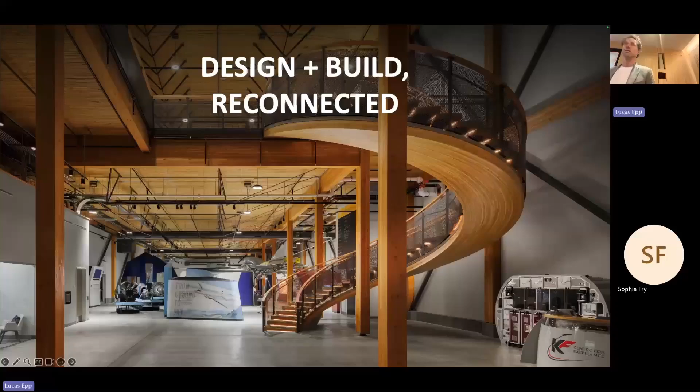Our company, StructureCraft, we're both structural engineers and builders, and we're founded by my father, Gerald Epp. And given that this is the International Association of Bridge and Structural Engineering, in some ways he should be talking here about his incredible bridges, because he has designed some masterpieces in timber footbridges.

And so our company, we work across North America and Asia. Starting to do a little bit in Europe, but not a huge amount. And we work on all types of buildings and structures, from long span roofs to bridges to office buildings, all sorts of interesting different structures, primarily with a bit of a focus on using wood as a structural material.

But perhaps uniquely our team, because we're both engineers and builders, we have carpenters, we have installers, we have people who know how to run cranes. We have master craftsmen, and we have computational designers and engineers. So we have this wide range of people who get involved all the way from conceptual design through to manufacturing and construction.

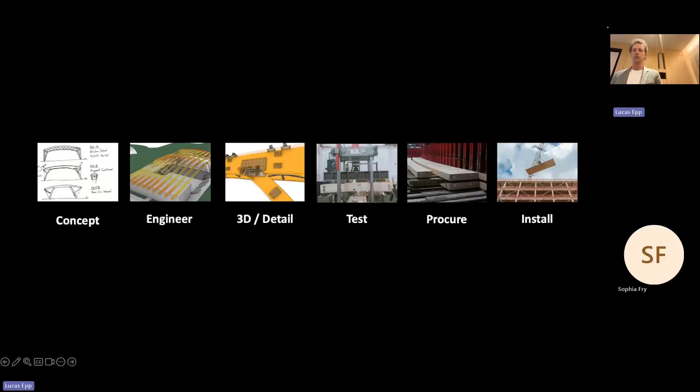And so today I want to talk to you a little bit about why we want to try to encourage a reconnection of design and construction. Going back in time, of course, there didn't used to be that separation. And I love this quote from Jörg Schlaich, where he talks about labor cost outweighing material cost, and as a result, we maybe don't put as much effort into the structures that we design, or we're not given the fee or the budget to put that effort in.

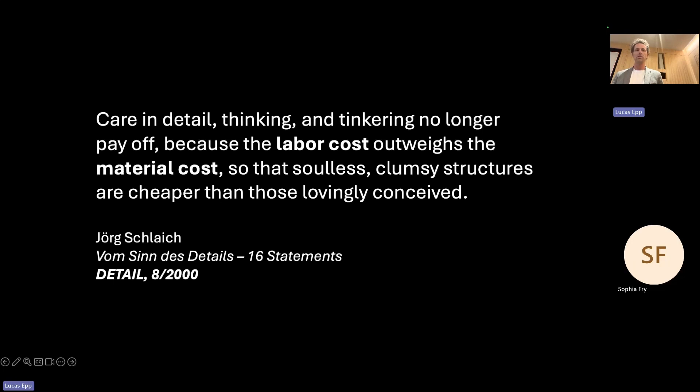And so then what results, if you look at our current building stock, results from the inability maybe to apply thinking as much as we perhaps used to. And so thinking about this a bit more, I started thinking about the interfaces that have arisen between us as

Everything good? Oh, okay, move it over.

Okay, thank you. But the interfaces that have arisen between us as designers or constructors and the buildings that we build. And I remember when I first moved here to London, I think it was 2008, I went and saw a lecture by Bjarke Ingels, and this was my first thinking about, okay, this is an interesting interface to think about design. Let's make it a cartoon, and let's communicate our designs through a series of almost cartoon-like diagrams.

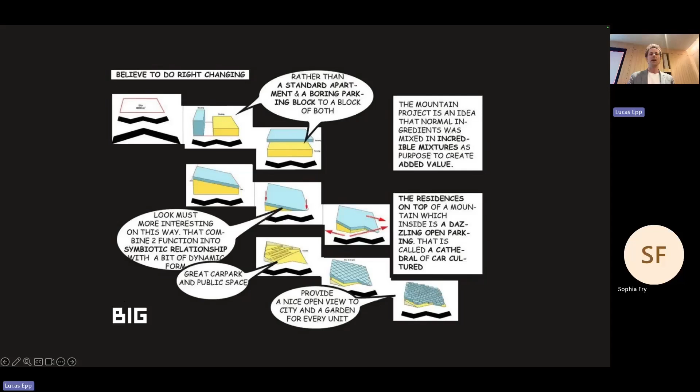But of course, we construct many different interfaces between us and our designs. Maybe that's computational design tools like Generative Components or Grasshopper, or maybe it's finite element analysis for those of you who are structural engineers in the room. But this is my father again, this direct connection between the human and the material. At the end of the day, what we are shaping are structures built out of raw materials.

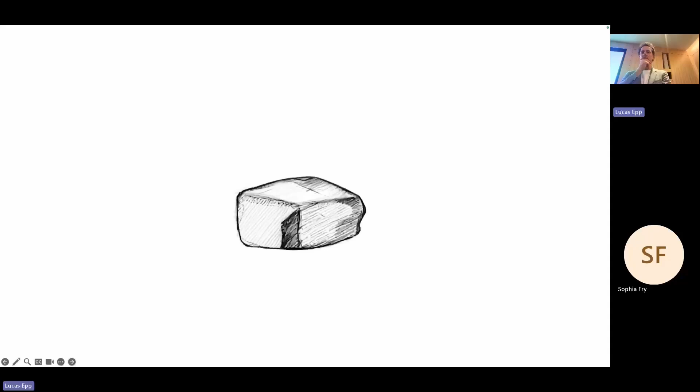And so if we think about us as designers back 6,000 years ago, this is in Mesopotamia, where you were shaping mud bricks with your raw hands to create your own house, right? And you had this almost visceral connection between yourself as a builder or as a shaper of material and the buildings you were designing. And so if you did a bad job, your building would leak, or you would have to deal with the consequences of your design.

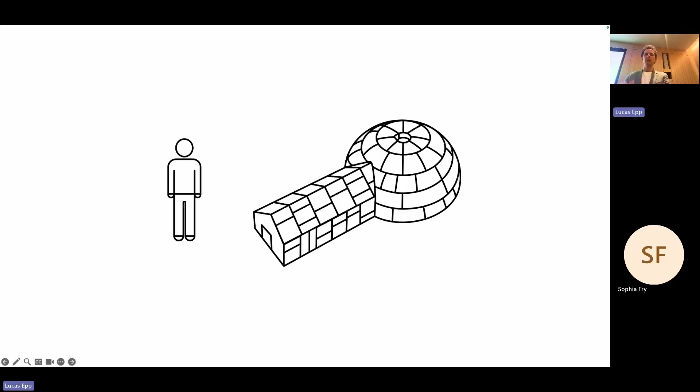And so I think we learned by doing, and we had this intimate knowledge of materials, and there was really not a huge barrier between design and build. And of course, the first interface, perhaps, that was constructed was the drawing, and this idea of abstracting design from the material feedback and starting to draw our designs so that there could be this separation between designer and builder.

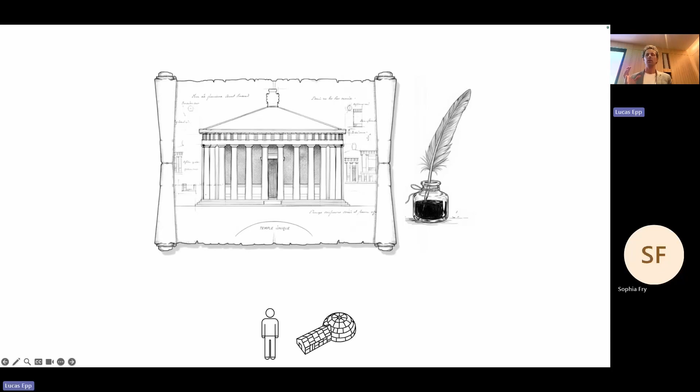But actually the separation between designer and builder didn't really occur until the Renaissance, because there's the architecton, right? The chief builder that connected the design to the construction. But it allowed us to imagine, abstract, but it did remove this immediacy of, say, material feedback. And so I think

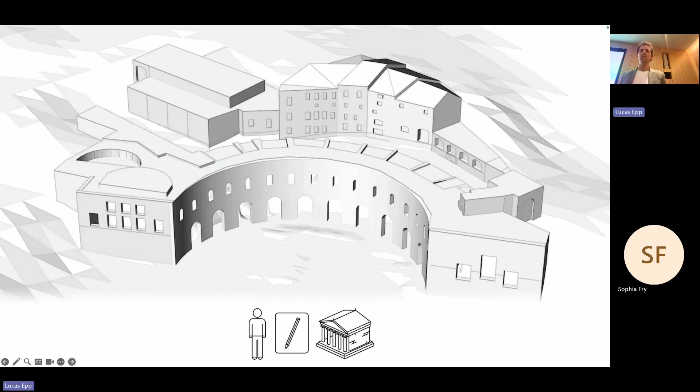And so the modules, I think, though, were beyond just a physical object. They almost became like a shared understanding, which allowed knowledge, like construction knowledge or design knowledge, to travel. This is Trajan's Markets. But these modules, once they became entrenched in the supply chain, designing outside of those norms became maybe a little more difficult. And so they gave us a structural design language, but in doing so, they started to shape what we say.

And then I think about the next interface. So you have the drawing, the module, and then of course the calculation. We start with the Roman arch, and then we start to understand funicular shapes and vaults, and we have groin vaults, and we have all these incredible innovations in using geometry to achieve efficient structural forms.

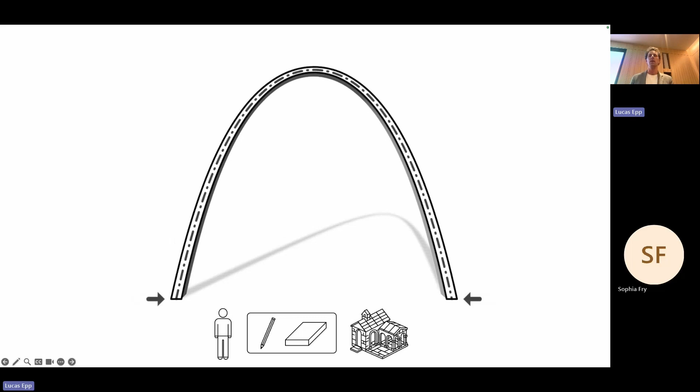But as that changed through time, we've moved from these efficient geometries, haven't we, into rectangular beams, which are highly inefficient, and our groin vaults have turned into big, giant, flat slabs, haven't they? And so it's interesting how, although we have this incredible capability to calculate our structures, often the structures that we do build aren't nearly as efficient as they actually could be.

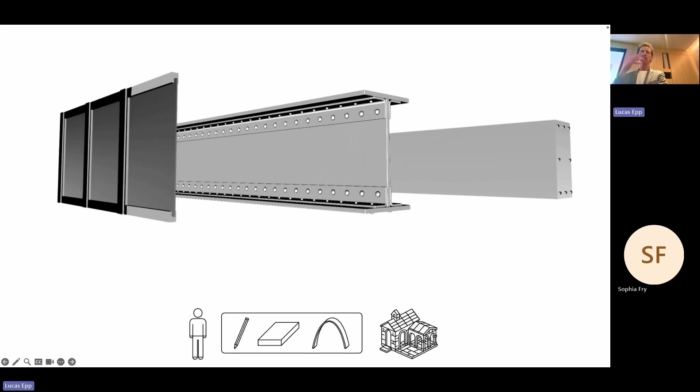And so, the next interface I think about is the catalog. During the Industrial Revolution, the palette of materials we have to design with just exploded, right? In the age of wrought iron, you think about the word manufacturing. It literally comes from the Latin words manu and facere. I don't know exactly how to pronounce it, but those two words literally mean to make by hand, right? And now we look at manufacturing today, it's become mass production by machines, right?

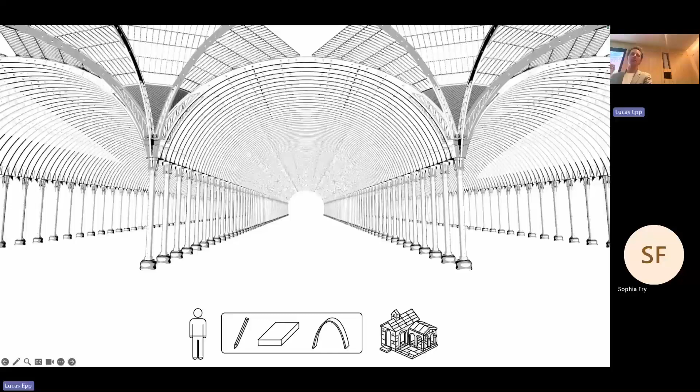And so the craft and the amount of detail and ornateness that we see. I was looking through some of the train stations as I was traveling around London for the last 2 days, and the incredible ability to shape raw material, even metal. Like today, we got shear tabs and bolts, don't we, for metal? We don't have the intricacy and the beauty of some of the early iron projects.

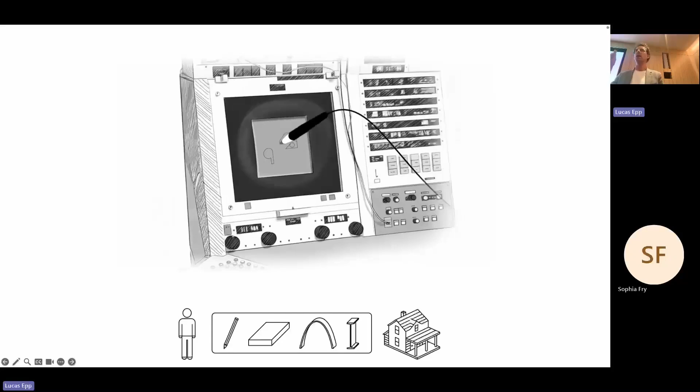And then, of course, the next interface that arose was the computer. And I like to go back to the origins of things. So this is Ivan Sutherland at MIT in 1962. And in 1962, he in one single thesis created the first object-oriented software, as well as the first touchscreen interface, including a stylus, where he was able to actually draw objects and create constraints that would automatically solve themselves. This was in 1962.

And then, of course, the computer morphed through time, and I think the computer both aids us and it limits us. You think about a hand-drawn line; it has difference of weight, difference of texture, difference of color and stroke, but the digital line is infinitely thin, right? It's mathematically precise, it's absolute.

I run a sketching class for our engineers, and I put a piece of CLT on the table, and I tell them, draw that piece of CLT. And so then they pick up their pens and their papers, and you have 40 or 50 different drawings of that little CLT block. And then I put up on the screen the Bluebeam version of that sketch, and it's all red lines, and it looks the same. And so you lose that human touch when you start to draw on a computer, almost by definition, because it unifies and averages.

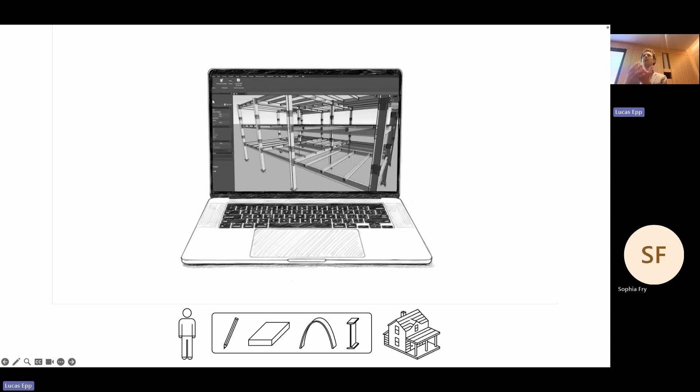And if we think about the computer, the next interface that's of course risen over the last 3-4 years is AI. And we talk about the computer making a drawn line average. Well, AI may make your entire building stock completely average, because that is what AI is. Large language models at the end of the day are generative pre-trained transformers, and they basically give you the average best result. That is how they work.

And so I think now we have this vast knowledge at our fingertips, but with this incredible power comes an incredible responsibility. So I think we as designers need to be careful of not passively accepting the machine's optimizations without understanding the first principles that guide them and are behind them.

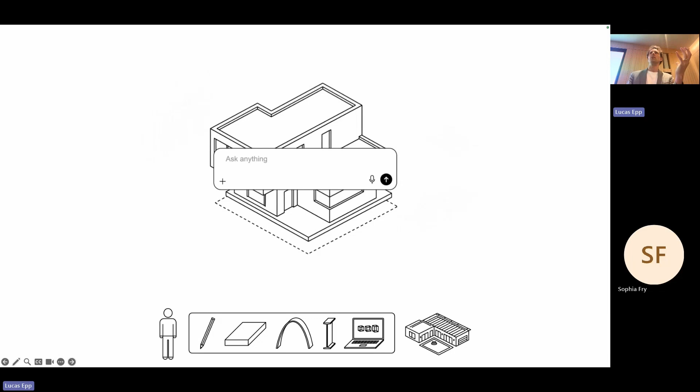So I think over the next 10 years, we're going to see an entire new realm of software emerge, because we're going to have tools that are smarter than anyone ever would have imagined. And the question is, what are we going to do with those tools, and how are we going to shape them? Because how those tools emerge is going to impact actually what we design into the future. Because I firmly believe these interfaces actually influence what we design.

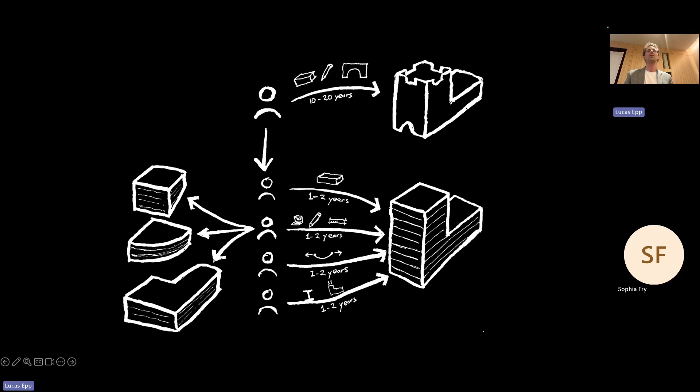And of course, it's not always true, but you look at the majority of building stock, and yes, it becomes easy to pick out of a catalog or easy to create a box. And I also think about the fact that humans, designers and builders, they used to spend 10 to 20 years on a project. And now, we have 1 to 2 years for each of us on any given project, and we're working on 10 projects at once or 20 projects at once, right?

And the way that the construction and design industry has moved, we've actually kind of erected a wall between design and construction. I call it the construction contract. And we lob change orders and RFIs over that wall at each other, right? And this wall becomes more of a divider than a bringing together.

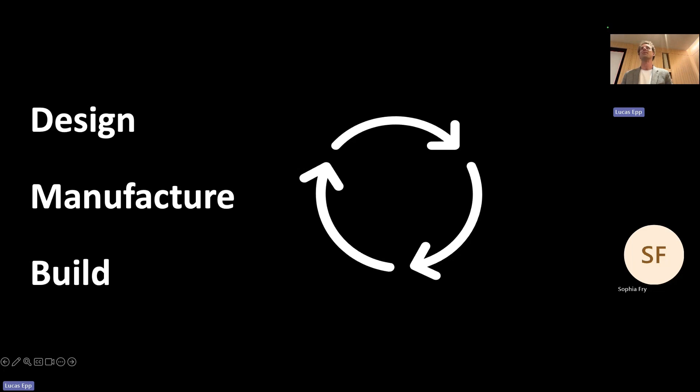And so, I'm a firm believer that we need to reconnect design through to manufacture through to construction. And that has to happen throughout our industry in order for us to get back to being able to build the Empire State Building in 13 months or whatever it was. So today I'm going to talk to you a little bit about shaping raw materials using timber.

And hands up in the audience, does anyone know what a peeler core is? One person knows what a peeler core is. Okay, so you take a log and you break it down into pieces of wood. Typically, we see them as rectangular pieces, right? And we see glulam made out of rectangular, we see lumber, CLT, etc.

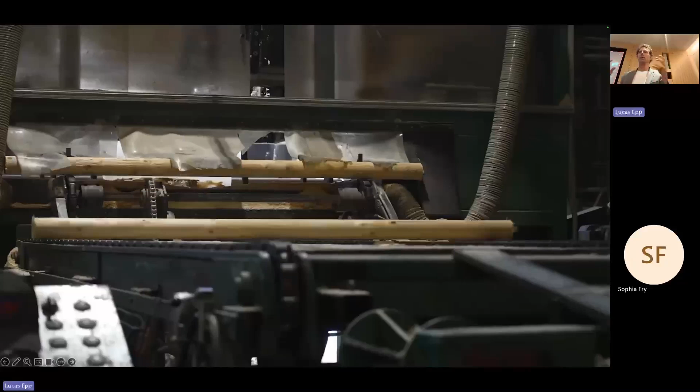But actually, plywood, the manufacture of plywood, involves taking logs and peeling them. And so after they've been peeled into these layers, these layers get kind of glued up into plywood, but you end up with the very center of the log, which is basically the most juvenile wood in the tree. And it's young wood, it's not very strong, it's very susceptible to checking, it's unreliable, statistically it's not very reliable, got a high degree of variability.

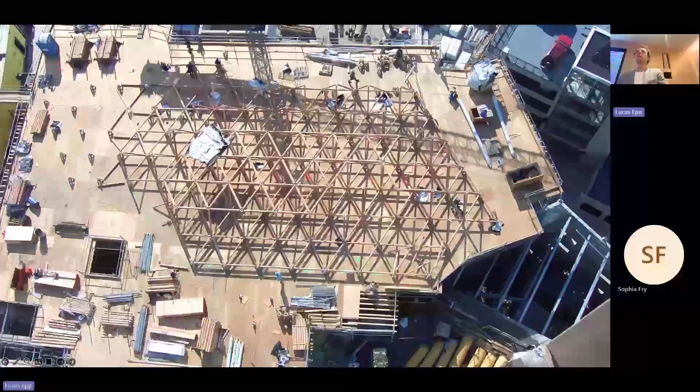But there's a lot of them. There's actually billions of these things worldwide, and they're either chopped up and made into basically pulp and paper, or they're fence posts, or not even, they just end up in landfill. And so this was an early project that my father did about the year 2000. And this is the idea of taking these waste material peeler cores and turning them into a tetrahedral space truss.

But in a normal consulting engineering role where you have no control over construction and over the build, how on earth do you get something like that to even exist? Well, how are you going to convince the general contractor? How are you going to convince the owner? Where are you going to source the material? How are you going to understand how much capacity these peeler cores actually have?

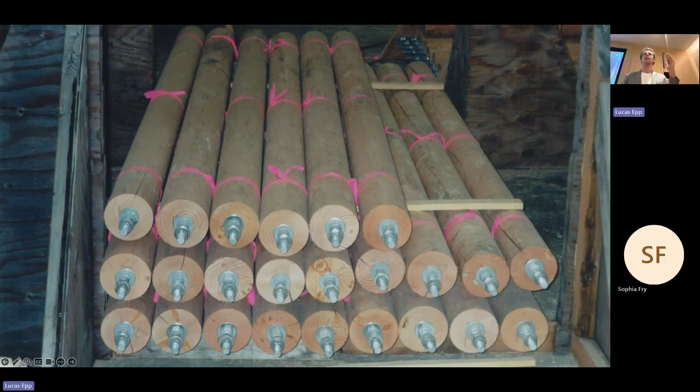And so his approach was, I'm going to go buy a bunch of these myself. I'm going to get a professor at the local university to go test them, and then I'm going to invent some connection to restrain the checking and the kind of problems that we have at the ends of these types of peeler cores, and then take on the risk of actually building the structure as the designer. And so by doing that, all of a sudden you can go realize the structure, and you can say to the client, I'm going to give you a fixed price for delivering and building this structure.

The next way of shaping raw wood, this is the 2x4, the ubiquitous American unit of lumber, right? And this concept was almost taking lumber and arranging it into these V-shaped panels to create a highly efficient structural form. So normally a 2x4, you might be able to span 3 meters with a 2x4. It's about 90 millimeters thick.

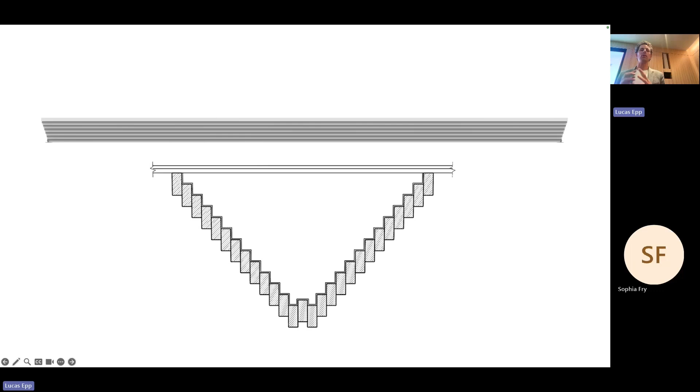But here, by arranging it into the shape of a V, not only do you create the structural efficiency of the depth, but you also have this ability of actually integrating acoustics into the panel. So only every second lamination is continuous. And so then there's these gaps that form that actually absorb the sound waves.

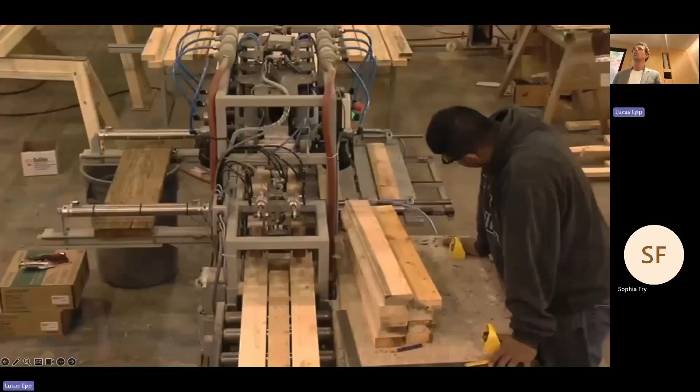And so on this project, we're actually figuring out how to manufacture those panels ourselves and how to actually create the machinery to go build these prefabricated panels and a hydraulic press to go bend it into shape, etc. And then we're actually doing our own load testing. And so this is full-scale structural load testing.

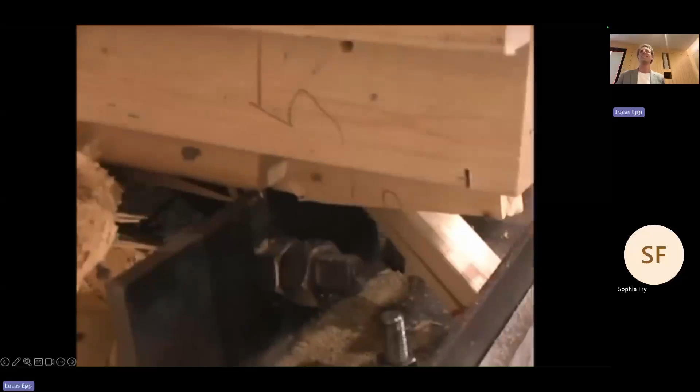How does this panel behave? Well, we don't know. Is our SAP 2000 model accurate enough? Maybe not. But let's go test it. Let's go test 12 of them and actually truly understand how the structure works, and then get happy with it, right? And so truly understanding how the structure performs.

So here's these panels getting installed. This is for the speed skating oval for the 2010 Winter Olympics.

Moving on from that, taking this curved lumber maybe one step farther and curving it into curved glulam. This is in China, a series of domes with Delugan Meissl architects out of Vienna. These domes were three different biodomes - a desert dome, an aquatic dome, and so on. They were kind of ideated as almost like a clamshell type of geometry, so they're not spheres, they're actually quite complex geometrically.

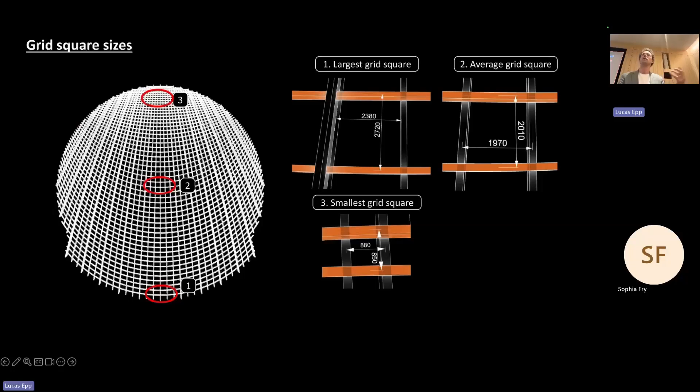But we had some different constraints, and we're starting to allow these manufacturing and construction constraints to actually inform the structural concepts we're coming up with. So here we came up with this concept of a prefabricated panel, but the size of it and how it's made is governed by needing to fit all this material into a shipping container. And we wanted doubly curved glass, but we wanted to limit ourselves to what's cheaply available in China for doubly curved glass. So those constraints started to influence the structural system and how that was ideated.

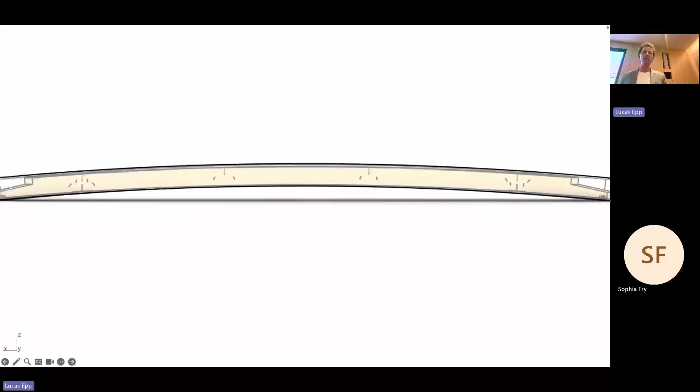So here you see this glulam, which is actually some of it singly curved, some of it doubly curved, and it's actually CNC milled to create the second curvature. But it's creating these prefabricated panels, which we're able to quality control off of the job site and then fly into place on the structure.

This is kind of almost like a shell structure with either 2 or 3 layers. This is quite a unique structure from an engineering standpoint, because you can't weld like with the British Museum or Smithsonian, where you have steel grid shells which are welded, and with the welding you get in-plane shear stiffness from a structural perspective. Well, with timber you can't weld, so you have this phenomenon we call in-plane shear buckling of the dome.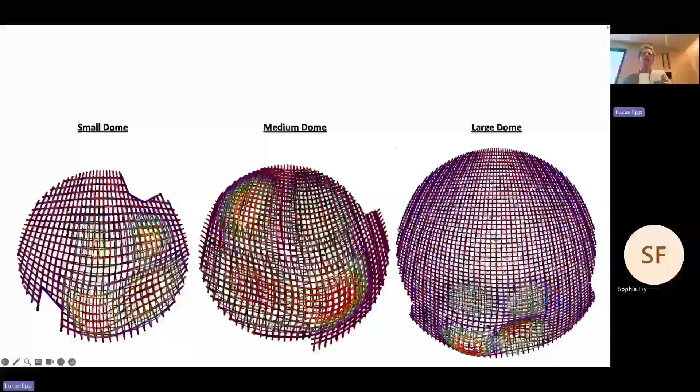So to restrain against that, we actually came up with this kind of diagrid of cables only on the largest dome. These cables run across the underside of the shell, and they're connected to this casting. We had to come up with a concept for how we were going to tension this cable net.

While I was here in London at Buro Happold, I got the chance to work on the Olympic Stadium, and I got to go out on site and watch them using these giant strand jacks to induce tension into the cable nets. But here, if we were to do that, these cables are connecting at like 40 or 50 nodes along the place, and we would have just ripped them out of the timber shell if we tried to yank at one end to induce tension.

So what we actually did is we came up with this concept of a threaded rod, which goes through the body of the casting and then has a nut at the back side. That nut actually spins and drags the entire cable net closer to the grid shell. By doing that, we've actually lengthened the cables and thereby induced pre-stress into the castings, into the cable net.

So here you see that casting, and everybody asks, was this bamboo scaffolding? No, it was not bamboo scaffolding. It just kind of looks like it in the picture. But here you start to see this shell take shape. This is, I think, maybe one of the first projects where we were really starting to think about how to reduce the steel in our timber structures.

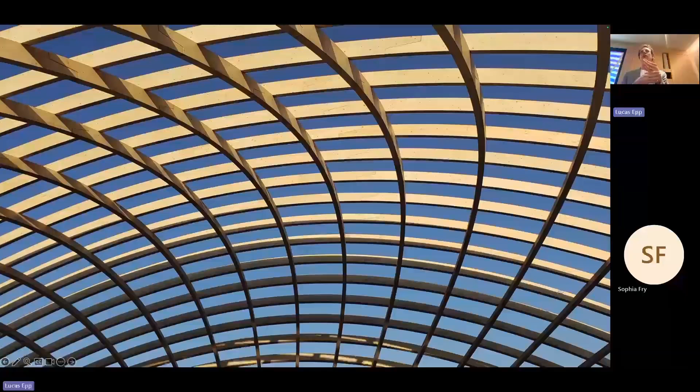So the only connection between these 2 layers is actually screws, nothing other than screws between these 2 layers of timber grid shells on the smaller domes. On the larger domes, we had the cable net underneath as well.

Taking that one step further, that idea of curved glulam - this is almost a hybrid structure in Chengdu, China as well. This is a series of vaults for an agricultural expo. Here we're kind of exploring a hybrid structural system, using timber chords for these trusses, but using steel webs to create this trussing and arching action.

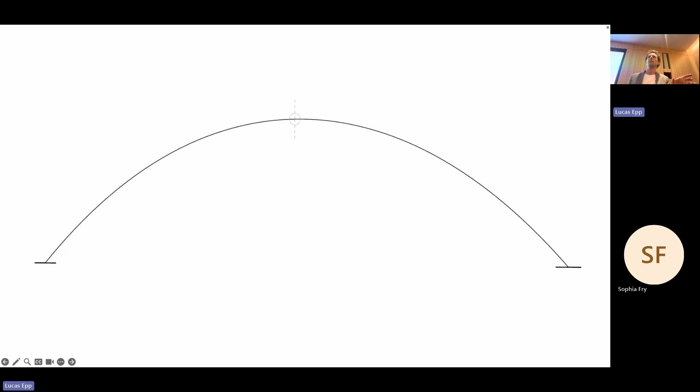If you think about an arch, obviously a catenary would be the most efficient arch. But when we started to think about trussing it out, we could achieve some structural depth at the base, and the bending moment diagram changes a little bit - actually the efficient shape for this structure becomes something which is kind of fatter at the base and a little more narrower up at the top.

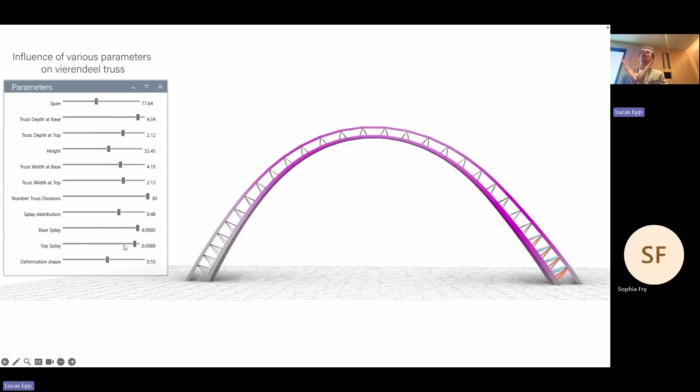And then we're actually coming up with this concept, which you can kind of start to see the hint of here, using these steel webs but not actually triangulating them. So we're not triangulating the structure, and we're using some optimization techniques to figure out the efficient distribution.

The reason these steel webs are not triangulated is from a construction standpoint - we want to be able to prefabricate. We had to build these vaults on top of other steel and concrete structures being built underneath them, so it's a very tricky construction sequencing problem. And we also had to build this during COVID, which was insane - we only managed to get one person into China during the entirety of the construction.

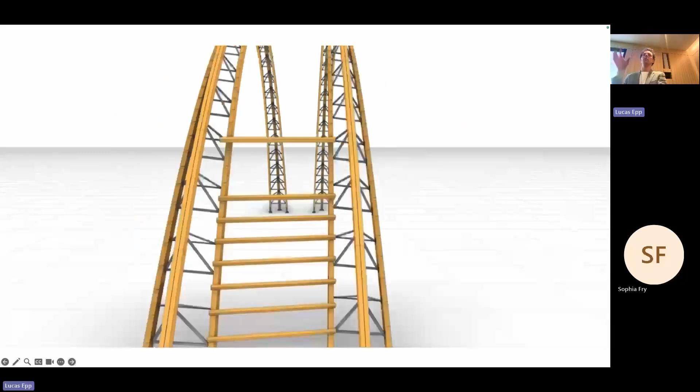What you're seeing here is our 3D IKEA sequencing diagram - how do you go build this thing in visceral detail? You do this, here's how the jig looks, here's how you install the screws, here's how we prefabricate these steel webs and splay them out and bolt them into place. Here's how we create this set of prefabricated components, manufactured at small sizes and then linked together into larger pieces that get craned into place on the job site. This is all about minimizing the number of picks and the amount of work we'd need to do in the air on the job site in China.

Here's some pictures during construction. We had to quality control this with drones, because we can't get up there, and nor can the workers, to be honest. We need to know if the connection got done correctly - especially in China, can we trust all these types of problems? The local design institute basically just handed it over to us, saying 'we don't know, you figure it out.' So we were both the engineers of record and responsible for the procurement of the material and the construction sequencing, et cetera, on the job site.

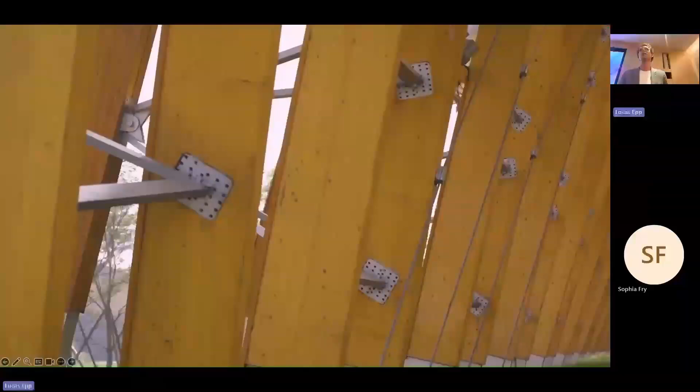This is Asia's largest timber structure - 75,000 square meters, a huge structure. It was installed in around 8 months, which is mind-boggling. I think we had up to 13 or 14 different cranes going at once on the structure. Pretty incredible. But one of the unfortunate things on this project is we weren't in control of the envelope. The timber is kind of exposed - we specified nice flashing details that they refused to install, so we're still dealing with the outfall of that. When you're working in China, you don't always get to control everything like you might elsewhere.

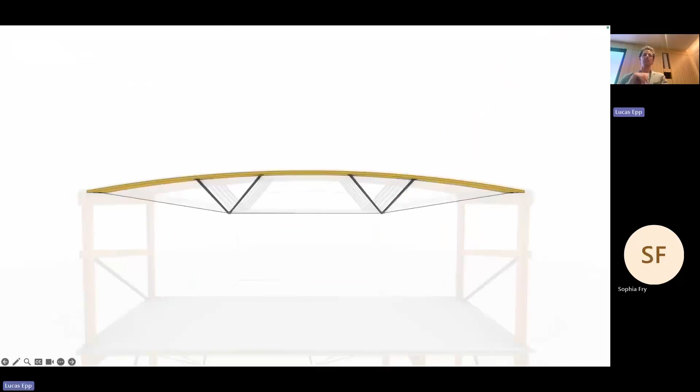Continuing on the theme of the 2x4, this is an aerospace museum project where we're bending the 2x4, but as a panel. Imagine taking a flat mass timber panel and bending it into shape, then pre-stressing it against steel wires. By pre-stressing it, we're creating a mass timber panel that can clear span 18 meters - it's 90 millimeters thick and spanning 18 meters, using these pre-stressed cables. So we're adding a bit of steel but creating a much more materially efficient structure.

Here we are in our manufacturing facility, testing out the bending for the first time of these mass timber panels, and then out on site, stringing up the prefabricated trusses to crane them into place, creating this almost rhythm of timber and steel trusses.

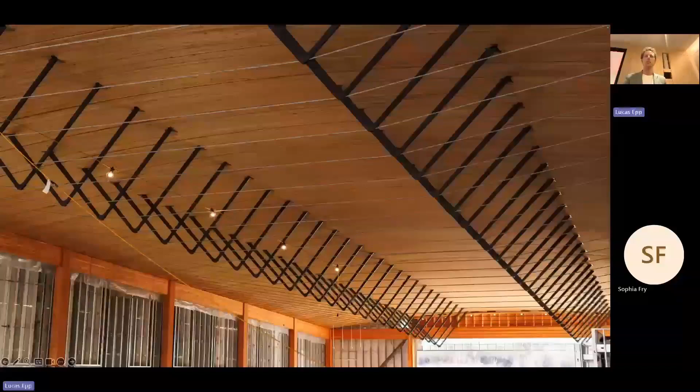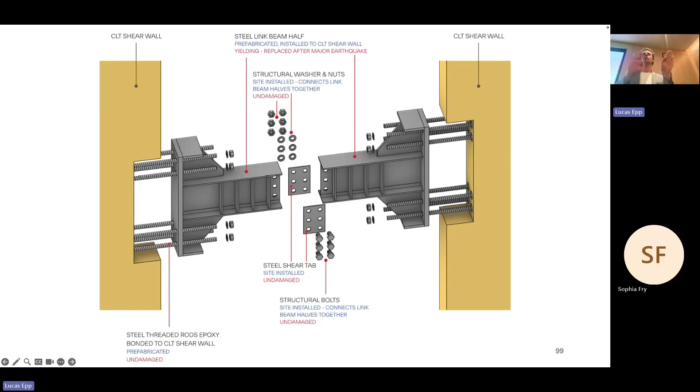Also wanted to talk about using timber in taller buildings. This is a residential building with Michael Green Architecture, where we're challenging whether we can use timber cores in high seismic zones - this is in Vancouver, a fairly high seismic zone. Here we're taking CLT wall panels and linking them together with steel link beams. These steel link beams allow us to create almost a ductile fuse, so that in the event of an earthquake, these fuses yield and dissipate energy as the building rocks back and forth. This is some PhD research from our engineers at the University of Canterbury in New Zealand, figuring out the hysteresis loops - for those who know seismic design, the energy dissipation loops for these steel link beams as you yield them back and forth. If this building gets built, we're going to see.

But if it gets built, it's going to be the tallest all-wood building in a seismic zone, I think, anywhere in the world. So it's a 12-story building.

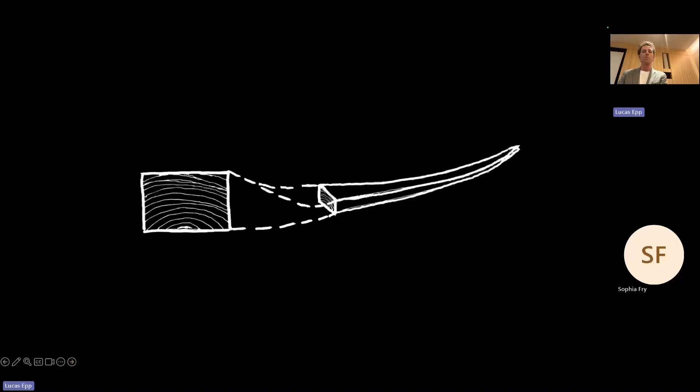That'll be cool. And this is my current favorite project, which we affectionately call the Pringle. I got sent a photo from the job site after we finished landing it about a week and a half ago, so you guys are going to see some brand new pictures and videos. I got a picture of one of my guys with a big giant Pringle in front of the structure, and the bag of the little Pringle container as well.

So this is for FIFA. It's like a band shell for World Cup viewings, and this is a really interesting structure from a few points of view. The actual geometry of the structure uses this middle one here, which is a surface of constant negative Gaussian curvature. I don't expect all of you guys to know what that means, but it basically means the surface has some very unique geometric properties, which allow us to create a grid on the surface.

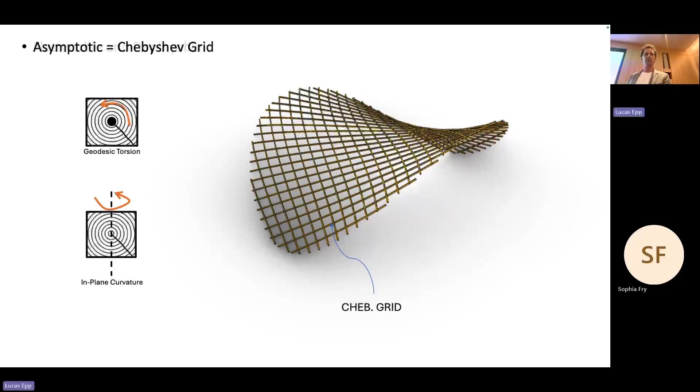If it works, maybe not. Try that. Okay, here we go. Which does that - so it's like a rectilinear grid of elements.

It's kind of like picking up with some of the things that Frei Otto did at the Mannheim Multihalle, and of course the Weald and Downland and Savill Gardens that so many at Buro Happold worked on. But we're actually turning it into something we're interested in using the structural system repeatedly, turning it into something we can prefabricate and almost crane into place.

And so this lath grid shell actually gets draped onto this kind of doubly curved glulam ring beam.

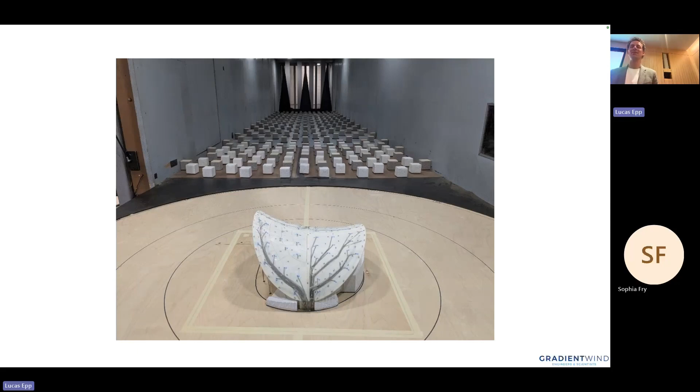We had some fun doing wind tunnel versus CFD on this. That was pretty interesting - as an engineer, I always wondered, can I trust the CFD or not? So this was my little nerd-out moment, and we got to do a wind tunnel and do the CFD and compare. Sure enough, the CFD is not quite there, so we had to use the wind tunnel results. That was pretty interesting though.

And here we are in our manufacturing facility, actually testing out the constructability of this grid shell. This is like mock crane day, right? So we've got the guy who's actually going to go build the structure on the end of this mini crane, and he's figuring out how it's going to actually fit, and where the stress points are going to be.

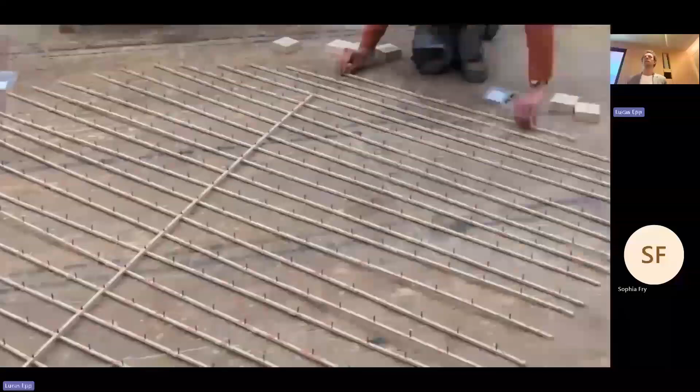This was pretty fun, just building models - this is a 1 to 10 scale model, so building models that are not just models to look at, but models to actually test and understand structural behavior. These laths are about 70 by 70 millimeters, and they're connected by a single bolt, which allows them to move and allows those rectangles to become diamonds, as this thing morphs into shape on top of the ring beam.

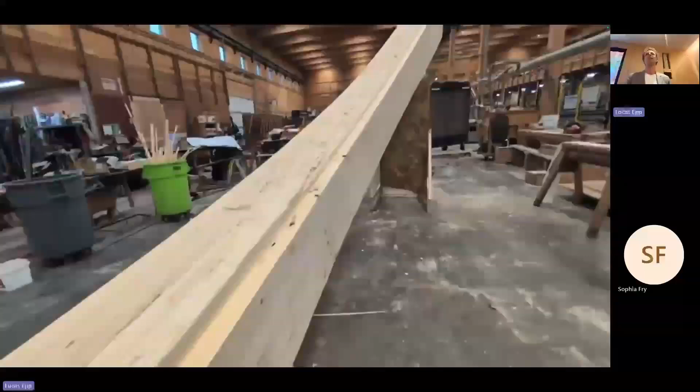Doubly curved glulam for the ring beam is something not really available in North America, so we actually went and figured out how to make that ourselves. We built giant jigs to press these huge bananas and create the glulam - here you see it in our facility. This was actually probably the hardest learning process on the entire job, figuring out how to actually manufacture doubly curved glulam that meets the structural and certification requirements. That was quite the challenge.

So here's the beams, and here it is coming into shape on the job site - just a drone view looking down at this kind of laths pre-built offsite, and then the ring beam ready to receive it.

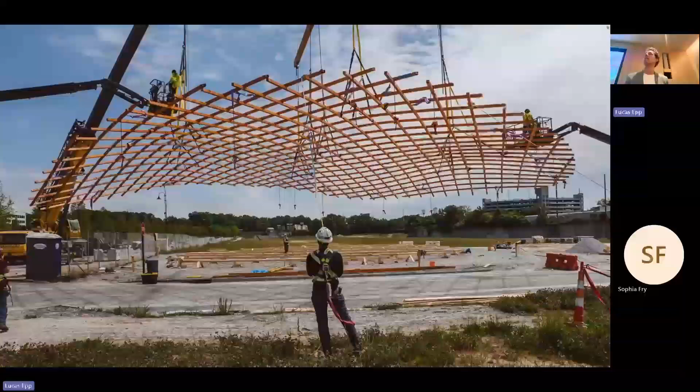I was out there, I think almost exactly 2 weeks ago. I went out there for the test lifts, not the real lift - I went for the pre-lift to make sure it was actually going to go okay. The neatest thing is you can literally come up to this thing, and I went up to that corner and just grabbed it - you can move it up and down by like 6 feet just with your bare hands, because it's so flexible. It's almost like a sheet of timber hanging there in the sky. So that was really cool.

But the most tricky thing here was actually the rigging design, and figuring out how to rig it so that as it comes and drapes down, you're not inducing undue stress into the laths as it's self-forming into this shape. So that was pretty fun.

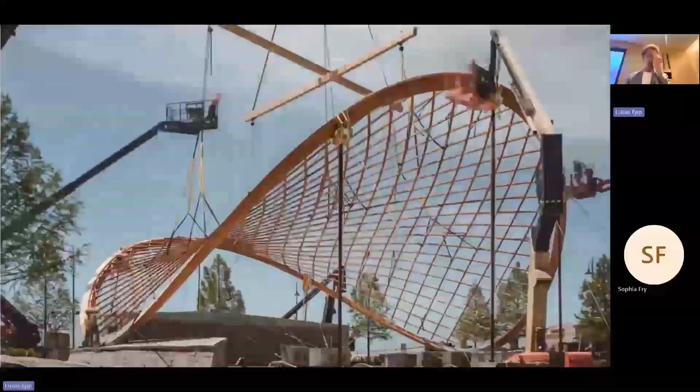But these are, I think, very efficient, material-efficient shells, because this is about a 25, 30 meter clear span, and we're doing that with 70 by 70 timber laths.

So lots of fun on crane day, and I got to be on the end of one of the taglines as we're kind of guiding this thing into place. So that was pretty fun.

But yeah, it's fun when you're building your own structures. You have more of an emotional attachment to them, and you're actually like, I care about the details. No, that has to be right, and you get to take a higher level of ownership over your buildings. Just go through some of the pictures of the, kind of starting to see the pattern of the shell.

So now I want to talk about this return to timber joinery I hinted at earlier. I think, if we think back to the birth of every structural material, let's call it rebirth, modern rebirth over the last 150 years. Think about iron and Brunel and the magic he did with wrought iron. And then you think about Candela and Isler and Nervi and the incredible work with shells, or Dieste with brick. Or Frei Otto with tension and timber, both.

In the early ages of each of these materials, there was a lot of innovation. People thought outside the box. They weren't limited by a catalog. They weren't limited by the wide flange section size with the shear tabs and 3 bolts, right? They could invent because the materials hadn't yet been codified into your, I don't know what the color of the book is here, but the red book, right, of steel details.

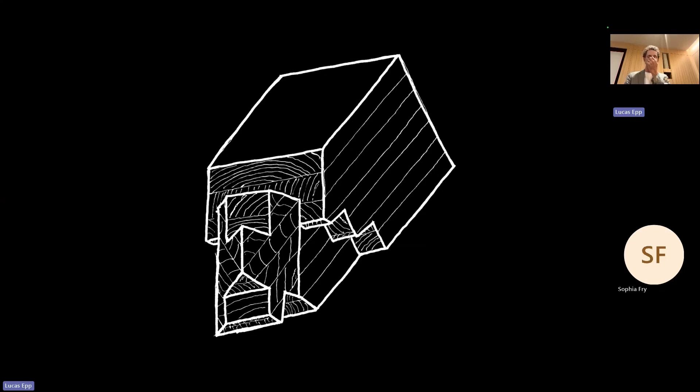And if you look at ancient timber joinery, well, there was none of that. First off, it didn't even exist. But they found ways. There were inventive ways. You look at historic joinery in Japan or in France or in Germany or in China, of course, incredible ways of doing and connecting timber. And so I'm just going to show you a couple of projects where we're investigating ways of creating projects with timber that use no metal in the joints.

So this first project is the New School of Architecture at the University of Kansas with Bjarke Ingels' group. And on this project, he was challenging the design team to think beyond typical building design. You want to challenge the next generation of architects and designers coming through this building to think differently about how we conceive of buildings. And so this structure is actually a diagrid. So it's like a timber exoskeleton. It's a 6-story building. But the lateral loads are actually all taken in the exterior. And so the central core is non-structural effectively.

And so in this building, we're actually exposing all the surfaces. We're attempting to remove all drywall from the building, no drywall. And we're using some really interesting mineral wool or hemp in the envelope to deal with thermal. And so for me as a structural engineer, the biggest challenge was, okay, so we have this diagrid. Well, how are we going to connect the timber elements together?

And so here I was on a call with Bjarke early in the project, and I asked him, so how do you want to connect the joints? Do you want to expose them? Do you want them to all just disappear? And then he started sketching, and then he was like, well, how do you want to connect the joints? So I had to go start thinking about, well, what did I want to do as an engineer?

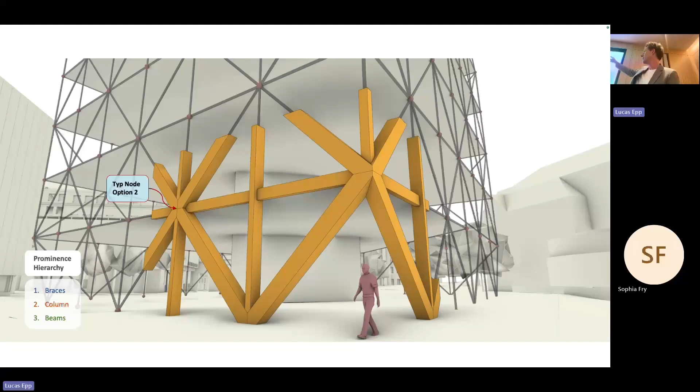And of course, you have this, we call it the hero node, where you have 6 stories of structure coming and transferring out to these 2 diagonal columns. And we're starting to think about how should we do these joints? Should the timber columns be continuous or break? And I started sketching some of the steel details that would be required, because of course my mind goes immediately to using metal. And I was drawing all these plates, and I was like, oh, there's going to be so much steel in this structure because the loads are pretty high.

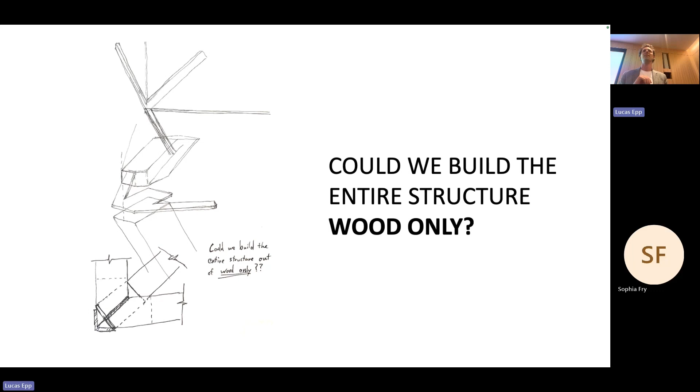And then I was like, well, what if we just flip the script, and what if we said no steel at all? No steel allowed. And so this was the next page in my sketchbook, where I started sketching this idea of using almost sawtooth joinery to connect the timber elements together and actually do that through geometry rather than through some sort of metal connector or screw or dowel.

And so this is us down in our workshop about 6 or 8 weeks later, doing a 50% scale prototype of that joint, and starting to see, is it going to fit? And can we do it? And what about the tolerances and shrinkage, et cetera? And so we actually got the opportunity to build a full-scale mock-up of one corner of the building.

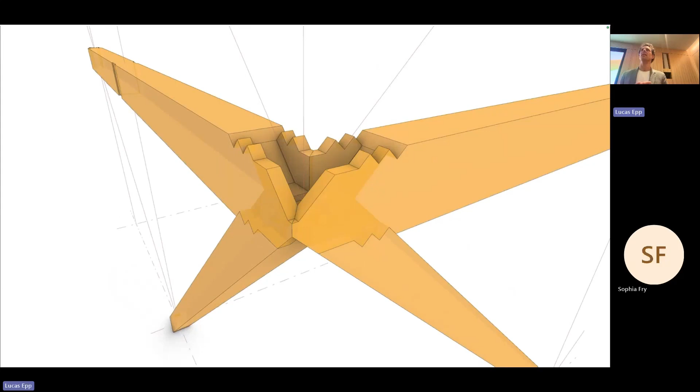And so this animation will show you, if you peel back the structure, which you can't really see the joinery when you look at it, how does that actually happen? There's a timber dowel, and then there's some little basically glorified plywood pieces, which create a shear key between the elements. And then we're using this big sawtoothing to allow us to take these braces and transfer the load in parallel and perpendicular to grain compression between the joints.

So a lot of fun exploring that even from a 3D perspective, but also starting to think about how do we do it on a scale. So this is the full scale mock-up. And then, how are we going to mill these? Are we going to put these on our CNC machine? Is the CNC machine accurate enough?

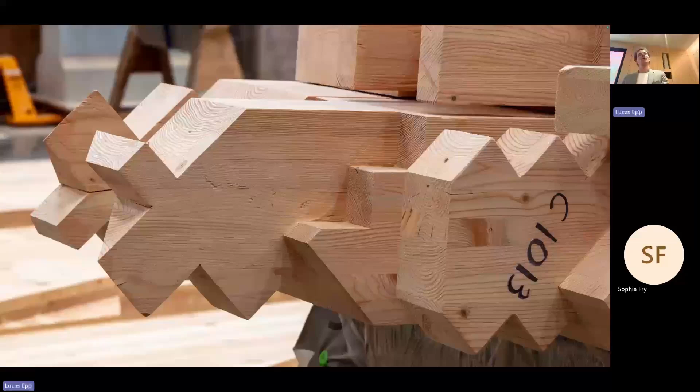And our master carpenters came to me and said, we ain't using the CNC machine for this one. Let us at it. We want to do this. And so we actually ended up using the CNC machine to take it down most of the way, but then the finishing touches were actually done by hand. And so that craft came back into it to achieve the level of joinery and tight fit that we're envisioning with the structure.

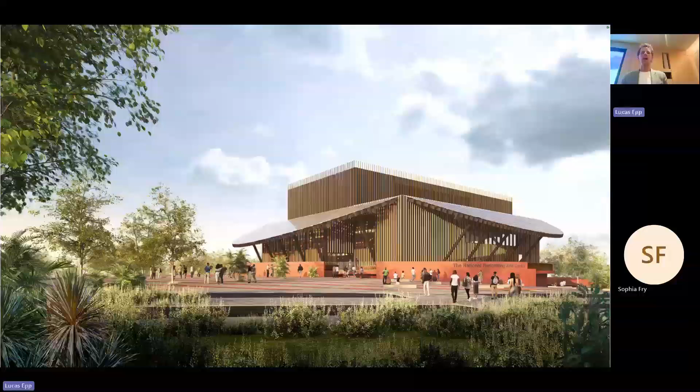So that was fun. And the next project where we had the opportunity to think about wood joinery was actually for a performing arts center in Barbados. This is with Ajay Associates, and this is the new National Performing Arts Center. And we got given kind of an impossible task. In about April of last year, they released us to start design and construction on a structure which needed to be built by August of the same year.

And as you can imagine, that's just an impossible timeline, right? And initially I was like, we're just going to turn it down. It's absolutely impossible. And then I started thinking, well, actually, maybe it is possible. It's going to be a crazy amount of work, but maybe we can find a way. And so we took the structure and de-scoped it down to this almost central pavilion. So you can't build the whole structure, but maybe you can build an initial part of it, right?

And so this is starting to sketch, okay, we have this big truss which goes across the main stage. And for that big truss, this is starting to sketch what the concepts were. And when we're coming up with concepts, because we have carpenters and people who are running our CNC machines, we can bring people to the table as we're ideating these connections that normally as a pure engineer or a pure architect you wouldn't have access to, right?

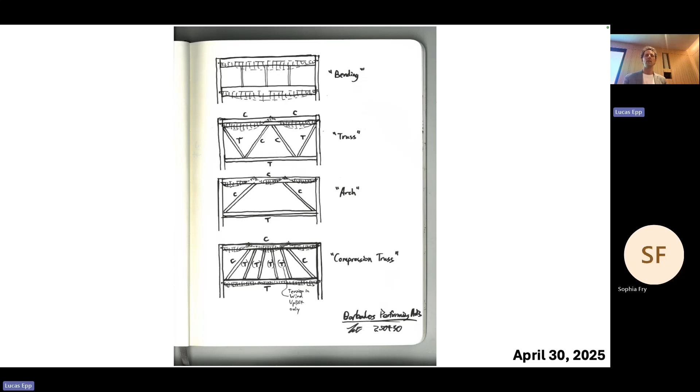And the idea I came up with was almost this compression truss, because with timber, you can easily transfer loads in compression. Tension's much more difficult if you're trying to do timber to timber joinery. So we're basically creating a diagonal arrangement, which is prioritizing compression. And this truss is clear spanning 80 feet, so that would be 20-some-odd meters.

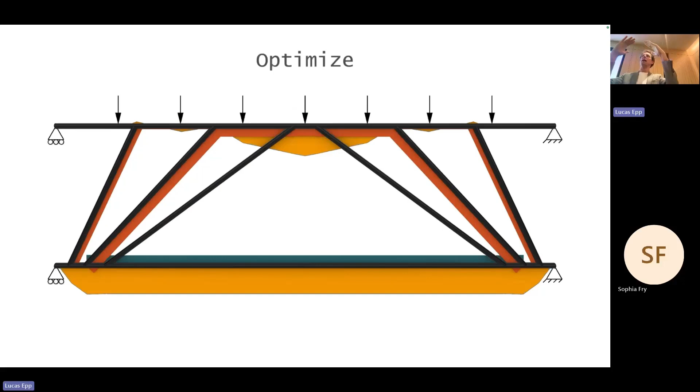This truss, if you just did two beams, well, you've got big bending loads, right? If you truss it out, it's great, but then you have all these big tension loads, but you can start to see almost like a proscenium arch emerge, right? And so this arching action in the form of a truss is really what we're going for.

And this is, okay, you just run your algorithms and figure out what the optimal thing is. And a lot of our engineers love to do this, but the interesting thing is you do that and the theoretically optimal design and geometry doesn't actually work, because it doesn't think about the connections, it doesn't think about splices and constructability and how the connections work.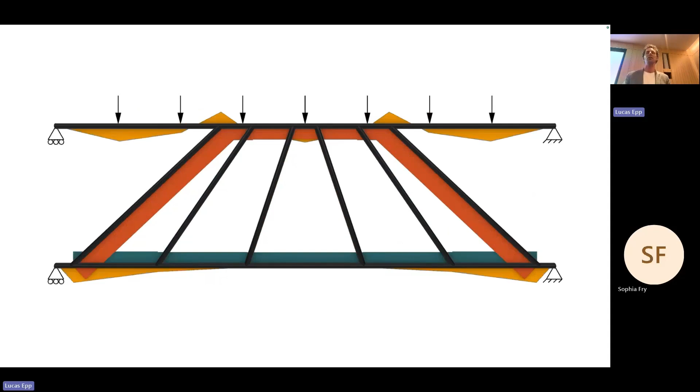So, you end up actually having to go change a little bit away from the theoretically optimal to, let's call it, real manufacturing optimal from a design perspective. And so this is kind of that truss in a render.

And what might those joints be if we actually just from the start said they can't have any steel? That's a fundamental assumption. There is no steel in the structure. Okay, well, what is that going to do? And what kind of geometries might we imagine if that is the predicate?

So here, this is like the bones of this canopy or temporary pavilion. And by the way, this pavilion is actually going to be part of the finished structure. So it's not like a throwaway pavilion. This is actually a part of the building. So we just build it out one more time.

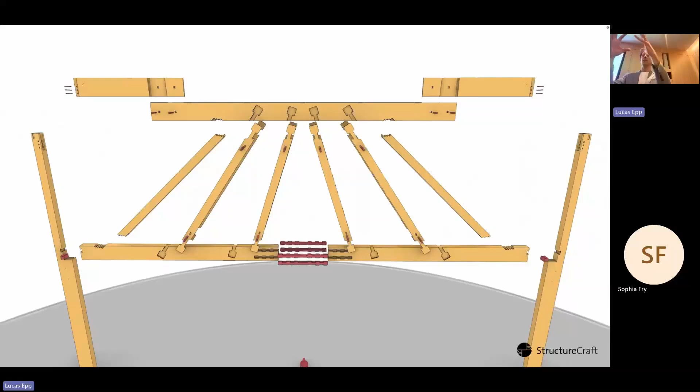But here now you're starting to see all the different joints that we're doing. So this is a big tension splice. This is taking about 150,000 pounds of tension. And these ones are more lightly loaded splices that are, again, just tooled into the bottom. And of course, we have to oversize the structural elements a little bit to make the wood joints happen. So you end up using a bit more wood.

But in this case, I think it was worth it, because I'm not saying that we should all use all wood joinery all the time, but by doing some of this, what I'm hoping to do is inspire people to question, why are we using so much metal, or why are we using so much material?

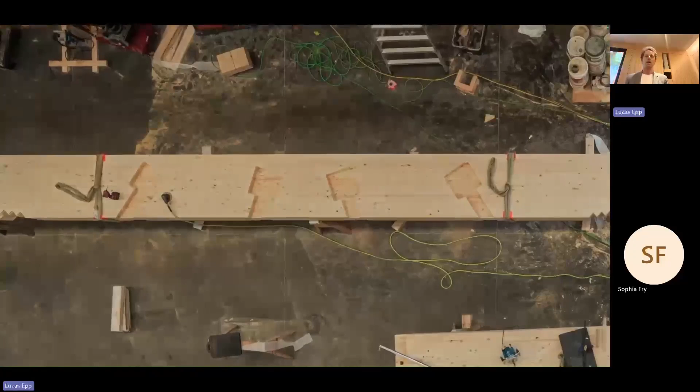And so here we are in our shop, chiseling out the material. These beams were too big to fit in our CNC, and to be honest, we didn't have enough time to CNC, because you only have 1 or 2 CNC machines, and you need to be working on many things at once if you're trying to design and build a structure inside of 4 months.

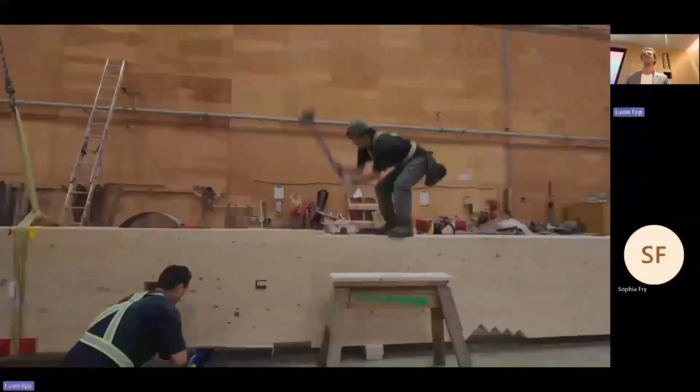And then, of course, shipping it to site, we had chartered 2 cargo jets to fly it from Vancouver to Barbados, because the timeline was just so tight. And then it turns out, guess what? The airport in Bridgetown cannot unload 747 cargo jets, because their scissor lifts don't go tall enough to reach the deck of the cargo jet. And so I was like, oh man, okay, we're not going to make it. We tried, but yeah, game over.

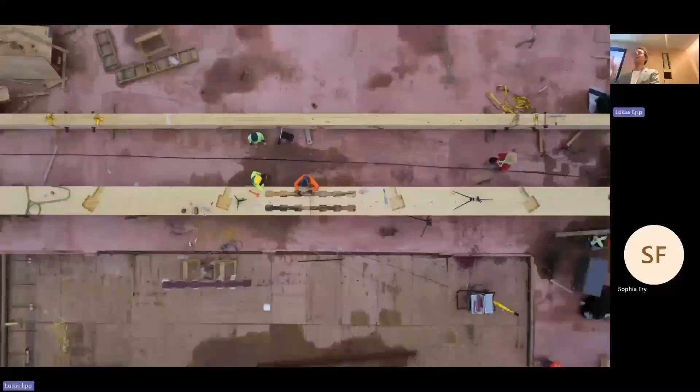And then we had this idea of, why don't we actually charter a boat? So we chartered an entire boat and we trucked the material from Vancouver to Houston, Texas, and then from Houston, a direct boat to Barbados. So we probably had it like 10% full, but it didn't have to stop anywhere. So it only took, I can't remember, a few days to get there.

And one of the other incredible things is one of the guys you saw in that picture of us sketching ideas worked not only in the 3D modeling, but also out in the shop on the carpentry. And then he went out to Barbados to help actually build the thing. So you have somebody who's involved literally right from concept to construction of the built structure.

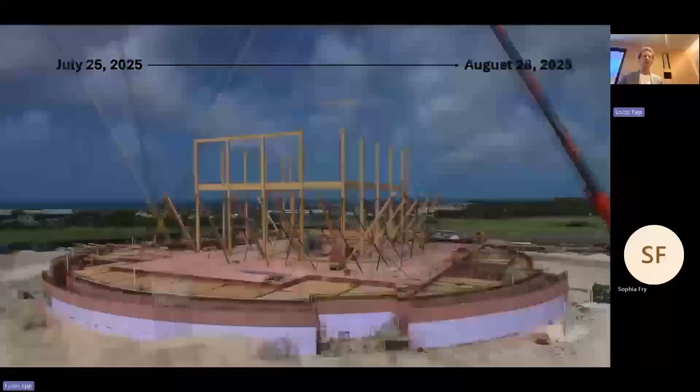And we actually managed to get the timber to the job site before they had even finished the concrete, which was quite something. And the reason this was on such a tight timeline was this is for Carifesta, which is the Caribbean annual festival. And the Prime Minister of Barbados wanted to host the opening and closing ceremonies in this pavilion, kind of launching it as the new Performing Arts Center for Barbados. So that was pretty cool.

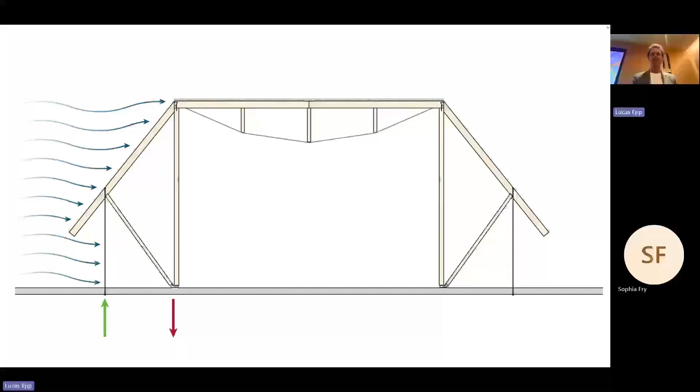And so we kind of just in the skin of time finished it. And so yeah, started design to construction in 4 months on this. You can't do this if you're not integrated. It's just impossible. And the reason I like to show this is because it calls into question, well, why are we doing it this way these days? Why aren't we more vertically integrated as an industry?

And finally, I'm just going to quickly talk about our software ventures. I've always been interested in software and programming as a person. And 5 years ago, I had the opportunity to start something inside our company we're calling Branch, which is kind of new software I'm envisioning for our engineering and manufacturing industry, because we went and measured our digital footprint, and it's kind of ginormous. 30 different pieces of software to actually get from conceptual design all the way through into manufacturing.

Really? Like, is that what we would have created if we were starting brand new and the computer was a new invention today? Would we have created 30 pieces of software to do what we do? No, right? And so, we're on a mission with Branch to almost create a new piece of software which allows us to go from design to manufacturing.

We started in about 2021, but by 2024, we had done thousands of shop drawings. We had built about 2 million square feet of buildings using Branch. And so we actually kicked out Tekla or Cadwork or HSB or these other detailing packages, and we only use Branch to do our detailing.

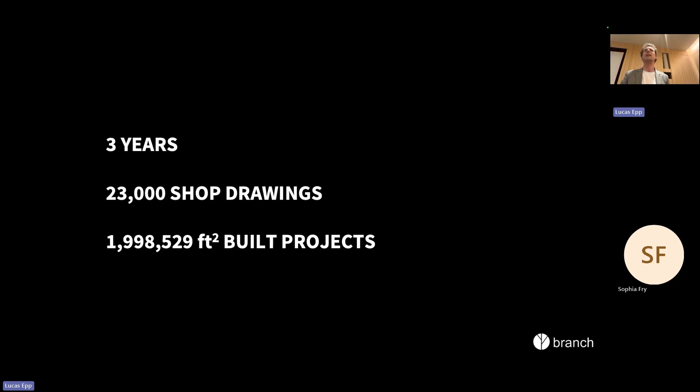And this is just like a sneak peek, a flash-through of all the different shop drawings that have been generated in Branch over the last 3 years or so. So all sorts of different timber and steel pieces, ending with the shop drawings for some of the pieces I showed on the truss in Barbados.

And so we started with this idea of making detailing software because I wanted to see, could we actually go build our own piece of software that could do anything meaningful? So we kind of succeeded at that, and now we're starting to look at conceptual design. One of my pet peeves is our finite element software as engineers is just so slow. Click a button, wait minutes. It's a disaster. Right? It shouldn't be that way. Our computers are definitely fast enough.

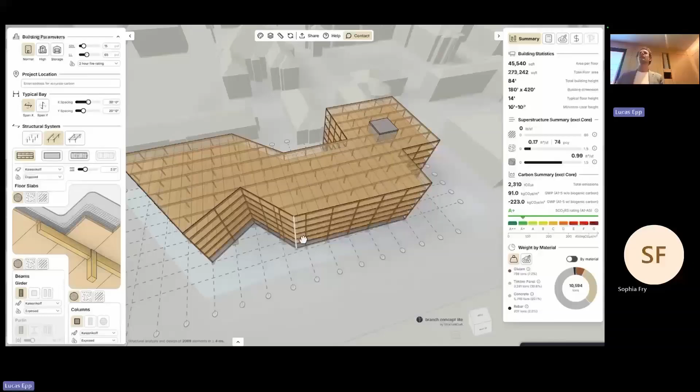So what if we went and built a piece of software that would allow us to analyze our buildings in milliseconds? And so as you push and pull, what you're seeing here right now is as this person is editing the massing of their building, it's actually in real time analyzing and sizing every single piece of structure in that building. So every beam, every column, every panel is actually getting live sized. And so what that means is you can go investigate your different grid sizes or your grid spacings. You can go see what the impact is on carbon or on your material quantities or your quantity takeoffs.

And now all of a sudden you can go study options, because I think often we don't study options because it's like, well, man, I've only got time to do one Bluebeam sketch of maybe 3 options for you, Mr. Architect. Sorry, that's all I got time for. But if you could go and investigate it more rapidly.

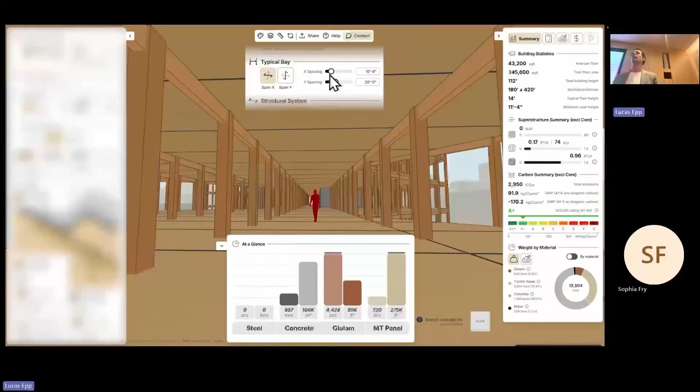The other reason I'm kind of obsessing on real-time feedback is because the human brain is incredible. We can take in feedback at way better than a 60 frames per second rate, right? And yet we're sitting there and we've got to go grab a tea because we're waiting for our model to run.

Well, I mean, that doesn't encourage creativity, doesn't encourage studying options. It doesn't encourage understanding your structure either, because you don't have immediate haptic feedback when you're using the software. And so this idea is kind of like that we could really change your spans or change your grids or change your material from concrete to steel to timber and understand the actual impacts on your building structure at a very early stage as you're changing these things, and truly start to explore more options and make better informed decisions, more efficient decisions.

Yeah, I know I'm still showing only rectangular buildings here. And I just finished earlier saying that we need to reintroduce curves for efficiency, but we'll get there. And so just to finish talking about AI, I think AI could start limiting us as designers. We could be delegating the work even more, removing ourselves even further from direct interface with our building structures.

But I think a better way of thinking about it perhaps is that AI is going to be like a toolsmith. It's going to create tools that we control. And that's one of the reasons I'm building Branch. I think it's very important how and who builds the next generation of structural design software. It should not be click a button and design my building.

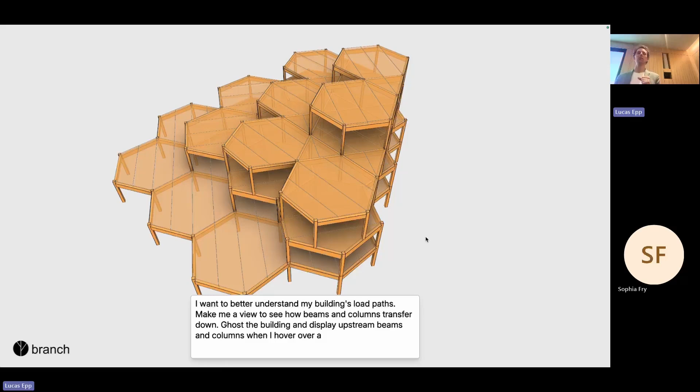And so this is inside Branch, more of a thought experiment than real functionality. But imagine if you had a structure this complicated and you wanted to start understanding how your building behaves, and what might AI functionality look like. Well, maybe it looks more like I'm telling it what I want to do. And instead of it doing it, it's actually creating a tool, and it's starting to live create tools that can allow me to better understand my structure.

And so now I have this column inspection mode because I said I wanted to understand my column behavior. And that's a custom created tool that I just created with AI live in the app, right? Or I want to understand how the forces flow in, let's call it the force graph of the structure. Or I want to understand the bending or the shear diagrams on my beams.

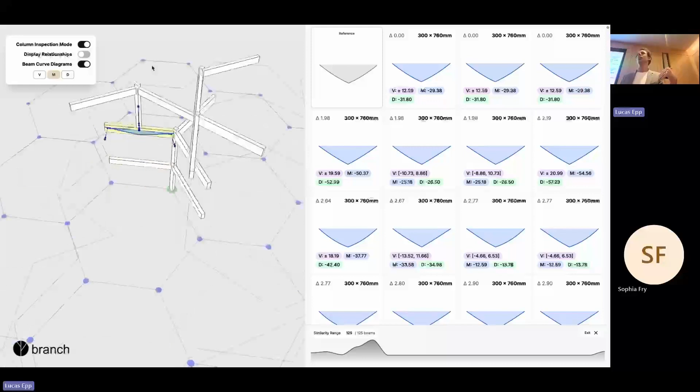And so I think AI is going to definitely change what software looks like over the next 20 years, completely and utterly. But it's very important for me that it's becoming more of a teaching tool. And actually, it's making software better, because think finite element analysis: we ended up creating software that all it does is analyze buildings. It doesn't actually teach you anything about design or even about what to look for when you're doing finite element analysis or whatever other structural design method you might be doing.

So yeah, with that, I want to just close and encourage everybody here to take joy in the details and master, of course, all these digital interfaces we have in front of us, but don't lose the connection to the material or lose the connection to actually building. Get out on your job sites, understand the contractors and what they go through and how they actually build the structures that you're ideating. So with that, I'm gonna close.